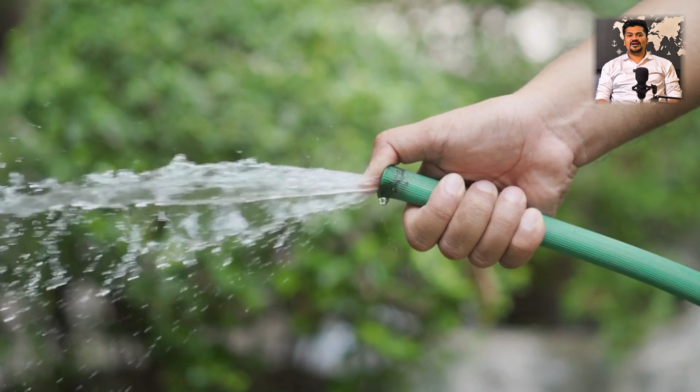Today we will see in the video what is a differential pressure flow meter and how does it work. Differential pressure meters work on the principle of partially obstructing the flow in the pipe. Imagine you are filling up a bucket with water from a hose. Have you ever noticed how the water comes out stronger when you partially cover the end of the hose with your thumb? That's because you are creating a pressure difference by obstructing the flow.

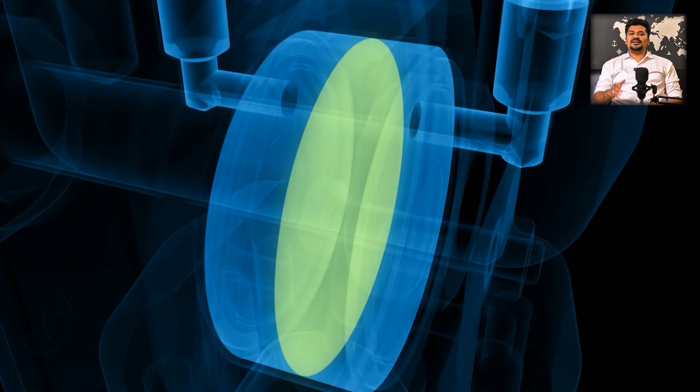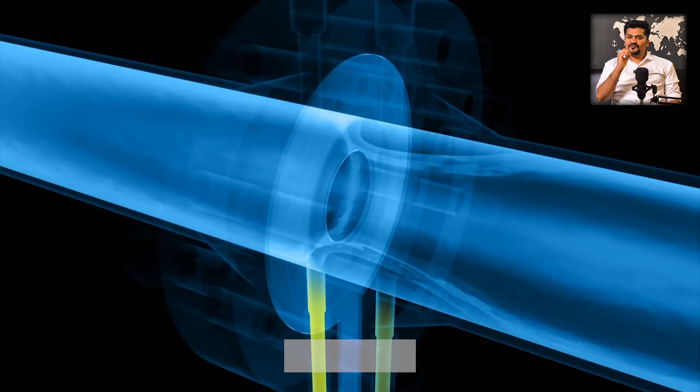Now think of a differential flow meter like a fancy version of that thumb trick. This creates a difference in the static pressure between the upstream and downstream sides of the device. The difference in the static pressure, referred to as the differential pressure, is measured and used to determine the flow rate. Differential pressure meters are hugely popular, and it's estimated that at least 40% of the industrial flow meters in use at present are

differential pressure devices, with the orifice plate being the most popular. Differential pressure devices have been used to meter a wide variety of different fluids, from gases to highly viscous liquids. The popularity of differential pressure flow meters is in part due to their simple design and low cost.

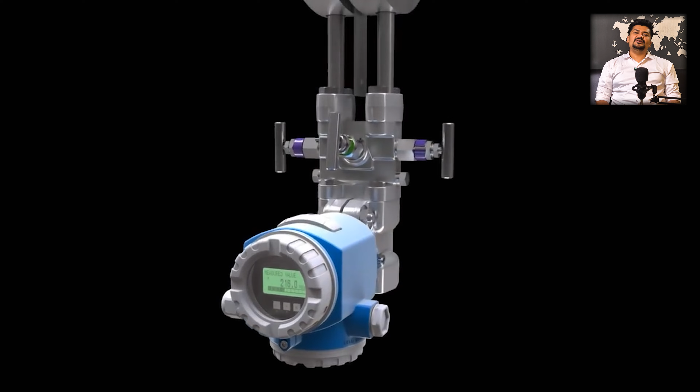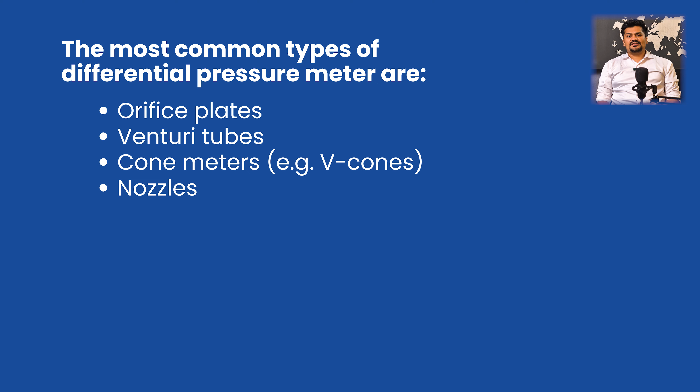The most common types of differential pressure meters are orifice plate, venturi tube, cone meters, nozzles, low loss meters, variable area meters, inlet flow meters, venturi cones, venturi nozzles, and drag plate. These are the main types of differential pressure flow meters.

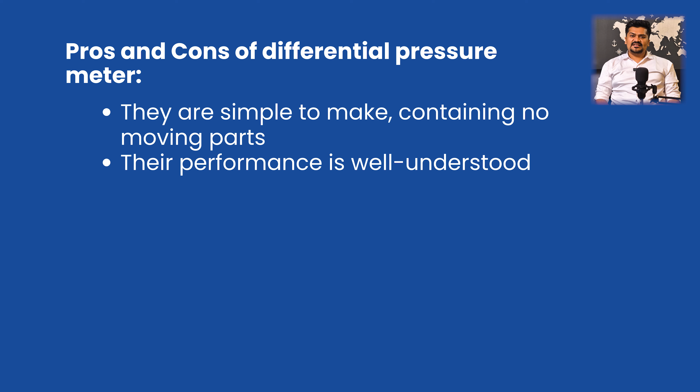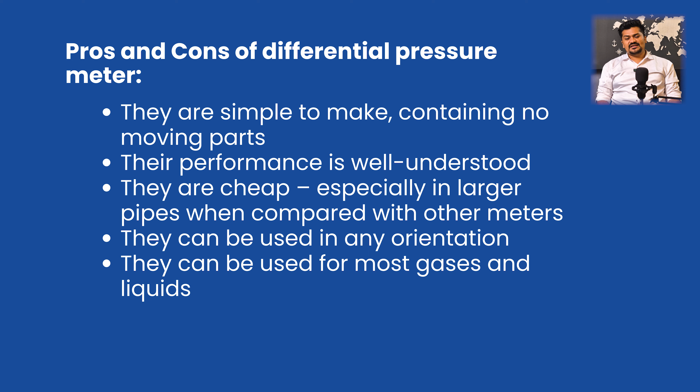Now let's understand the pros and cons of differential pressure flow meters. They are simple to make, containing no moving parts. Their performance is well understood. They are cheap, especially in larger pipes when compared with other meters. They can be used in any orientation. They can be used for most gases and liquids. Some types do not require calibration for certain applications.

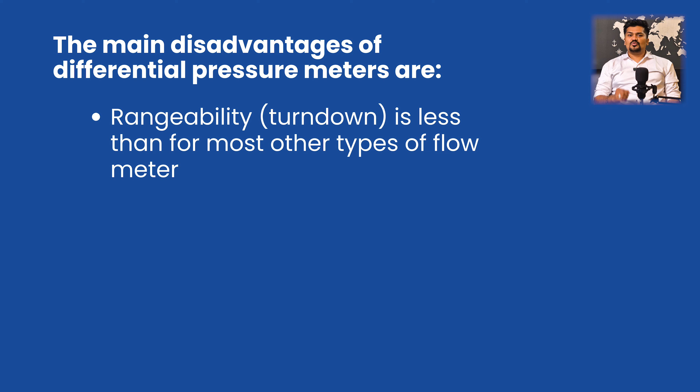The main disadvantages of DP meters are: rangeability is less than for most other types of flow meter, significant pressure losses may occur, and the output signal is nonlinear with the flow.

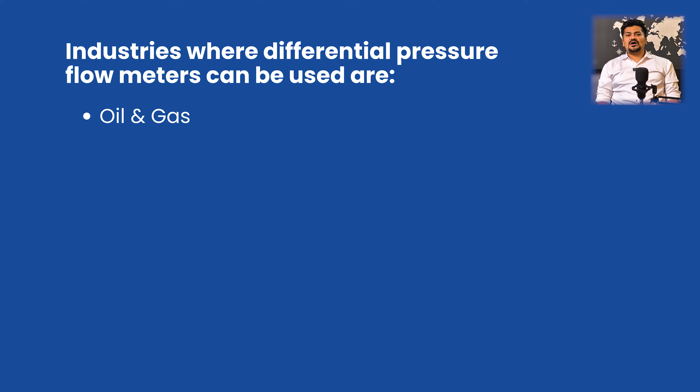Industries where differential pressure flow meters can be used are oil and gas industry, chemical processing, water and wastewater treatment plants, power generation, HVAC, pharmaceuticals, food and beverages, pulp and paper, mining and minerals, aerospace and automotive. These are the basic industries that are using differential pressure flow meters.

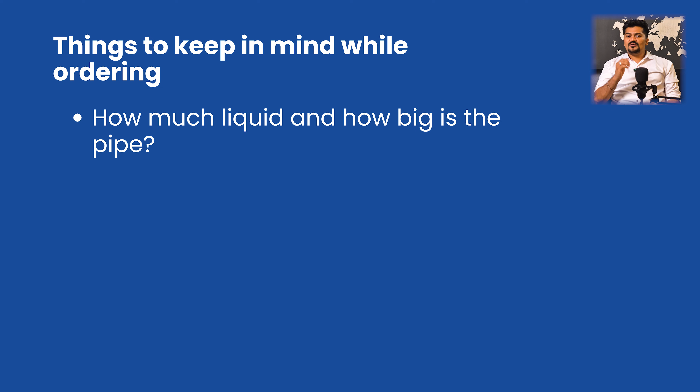Now, let's understand things to keep in mind while ordering a differential pressure flow meter. First, how much liquid and how big is the pipe? Second, what kind of liquid are you measuring? Third, where and how will you install it? Fourth, how accurate does it need to be?

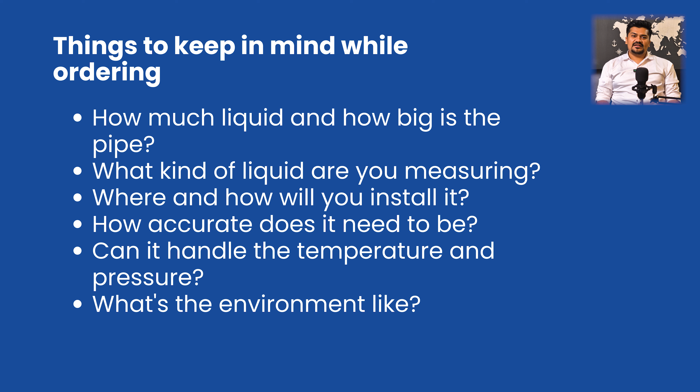Fifth, can it handle the temperature and pressure? Sixth, what's the environment like? Seventh, any extra features you need? And eighth, how much does it cost?